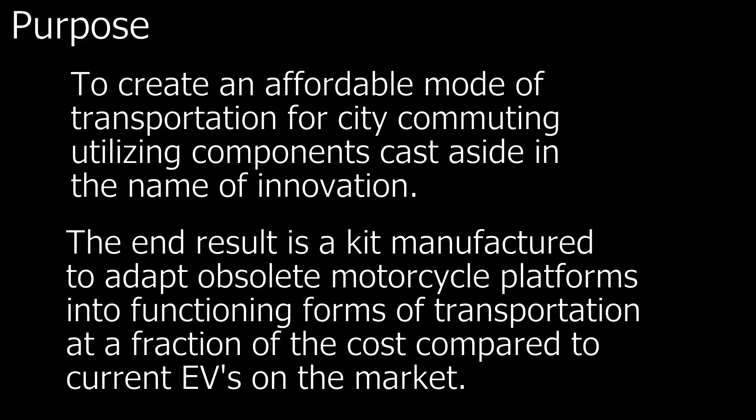The purpose of my project is to turn forgotten materials such as older motorcycles into functioning forms of transportation, while also solving a crisis involving budget as well as the environment.

Comparable EVs on the market include the Tesla Model 3 at $40,000 and the Harley-Davidson Livewire at $30,000. My budget goal, on the other hand, is merely $1,400.

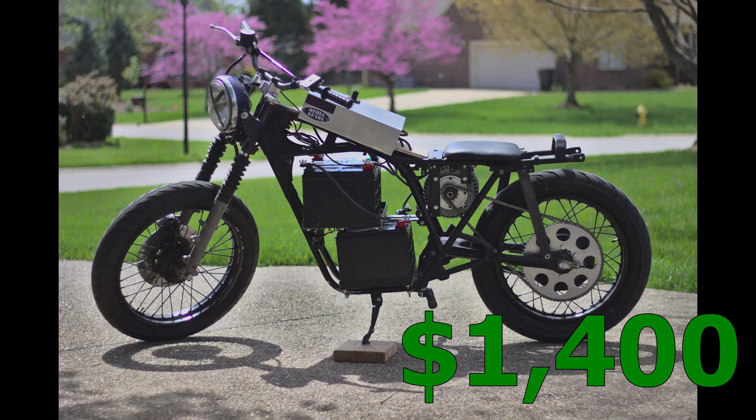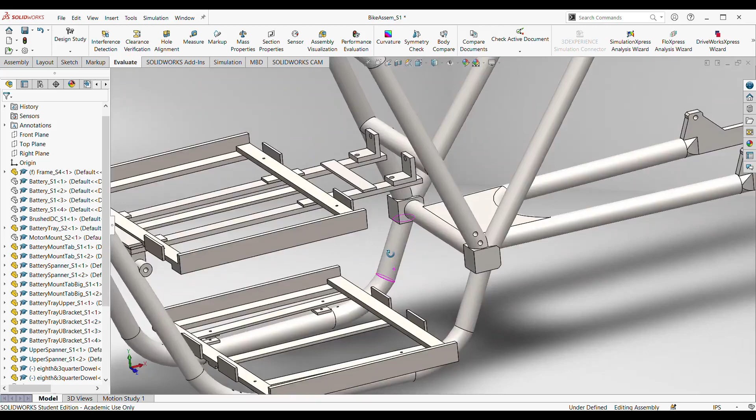So, on to the build. My build starts with a virtual recreation of my motorcycle frame, recreated in SolidWorks. Here we see the frame and the beginnings of my battery tray. We put them together, and we see that we can use old mounts and continue to grow using the old motorcycle platform. Eventually, we will move on to the motorcycle motor mount, which sits under the seat.

Eventually we can mock up the real-world motor that we will be using in the project. Here we can see how the underside of the mount attaches to the motorcycle frame.

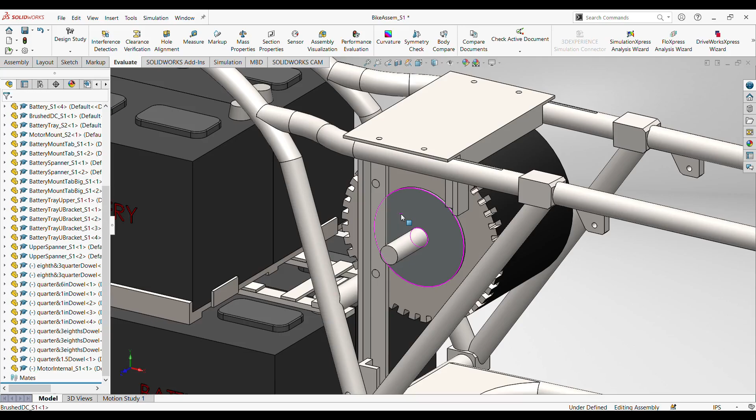The motor we will be using is a 15 kilowatt permanent magnet DC motor capable of 150 amps continuous and a peak of 300 amps. Electric motors behave differently than internal combustion motors, but we can expect around 18 horsepower from this motor.

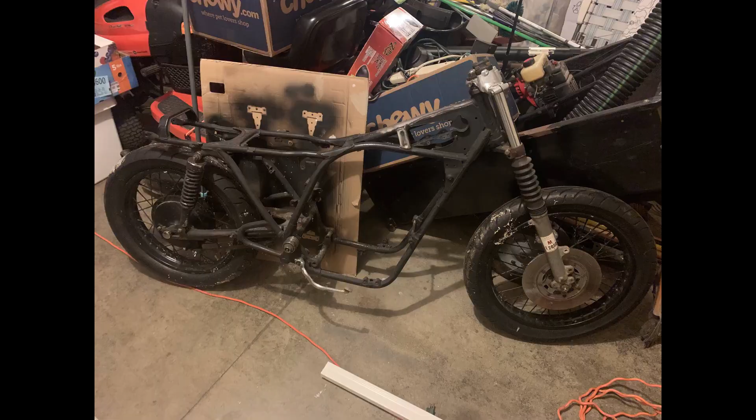Now that the virtual work is finished, we can begin on the physical work. The first of which involved removing all the old mounting tabs and hardware left on our old motorcycle.

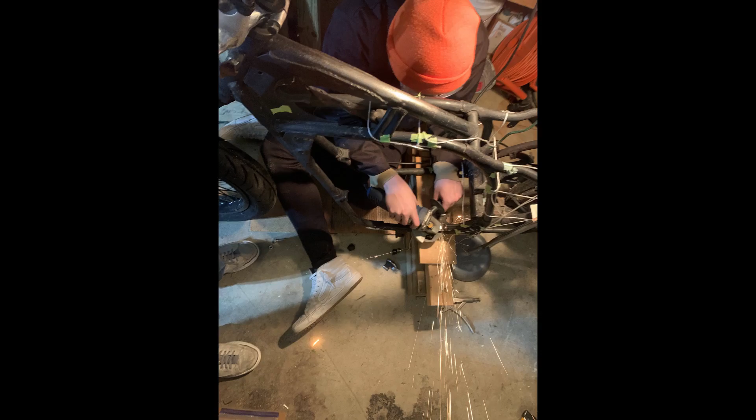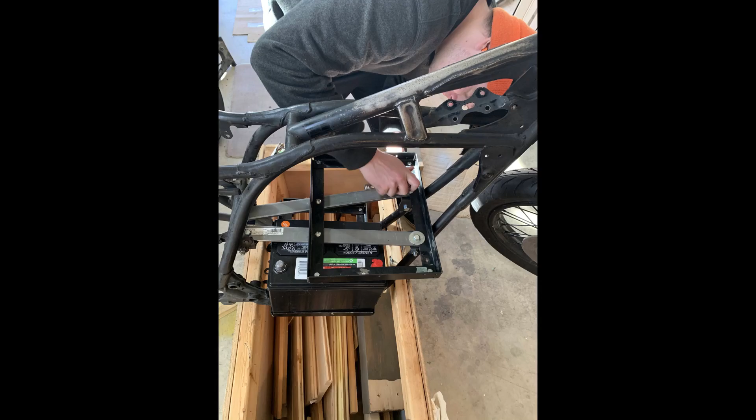The second part involved making our precision cuts and drilling in order to retrofit and begin fabrication of our custom mounts. The first of which is our battery tray, and the second of which is our motor mount. Both the motor mount and the battery tray use recycled forms of steel angle iron and flats.

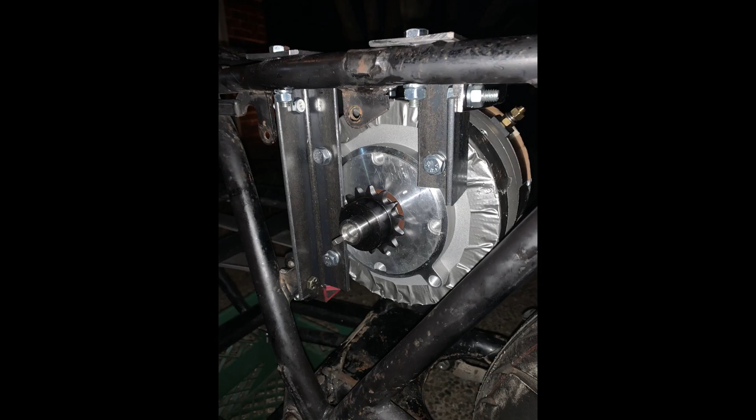The sprocket system utilizes a standard 14-tooth sprocket and a custom CNC milled sprocket with 72 teeth in the rear. The final step is the wiring, which I'll discuss further in just one moment.

Now that everything's pieced together, we're ready for a quick test drive. The first test seen here was ultimately a failure, as we had yet to tune the computer and had also not properly tightened the chain.

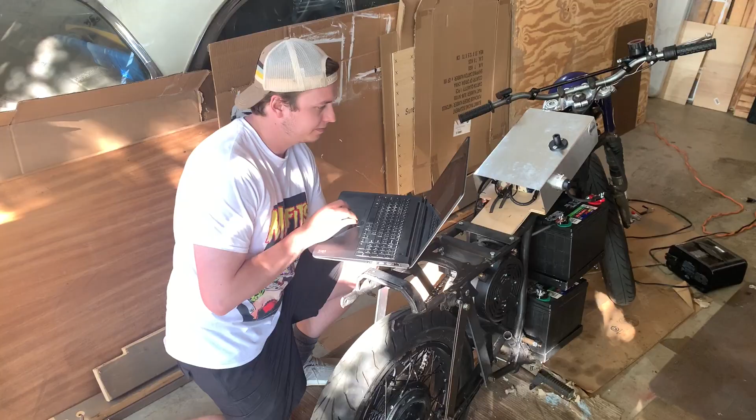So after that first failure, it was back to the computer. Let's take a look at the wiring.

The main system features a negative ground and a positive line into a 400 amp fuse and eventually into a 48 volt contactor. This contactor works by only allowing the system to operate if 48 volts is supplied. This is a recycled unit off an old forklift.

The computer is set up as follows. There is the main 48 volt positive in, the motor out, the throttle input, and a 48 volt system ground.

After multiple changes to the throttle input curve, as well as setting the bike acceleration to no more than 40%, we see here a successful test in which we're able to ride the bike around the block without crashing. A few minor cosmetic upgrades later, and we're left with a finished product.

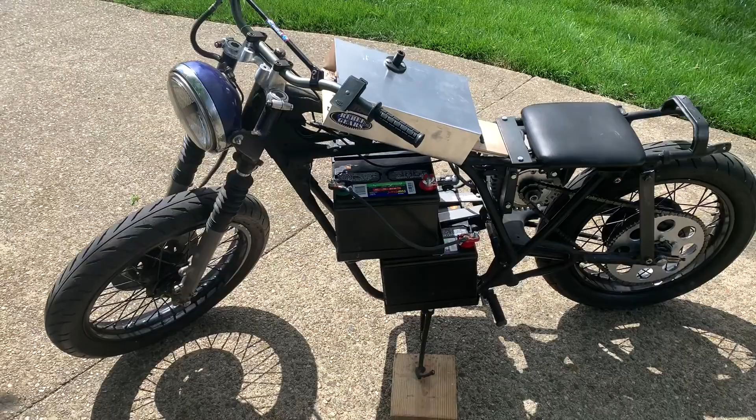But at this point, I bet you're all wondering, well, does it work? Or rather, is it practical?

Well, first we wire our 12-volt batteries in a series. There's a total of 4 batteries. At the end, you should be left with 2 leads, a negative lead and a positive lead.

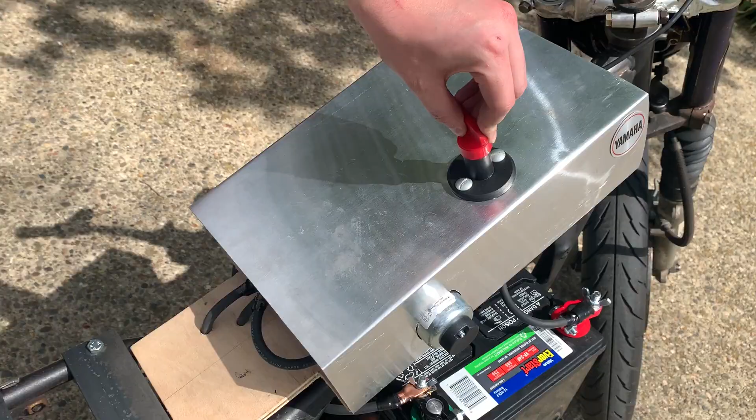Once those are connected, a simple twist of the key and a loud thump later, and the bike is ready to ride. With 4 fully charged batteries, I was ready to begin the first test.

The first test is range. In order to accurately calculate the range, I rode the bike from full charge to 0 in a relatively calm portion of where I live. I chose a speed of roughly 25 to 30 miles per hour in order to keep the motor under constant load. This would give me a more conservative range estimate.

My goal range was calculated as so: we should get around 32 miles out of our system. Unfortunately, I was only able to reach 20 miles during the test.

The acceleration test resulted in roughly a 1.7 second 0 to 30 time, which is a stark improvement over the stock bike, which would have been around 4 seconds. Braking from 30 miles per hour seemed to be comparable to the standard bike's time.

The final test is maneuverability. Although hard to quantify, I determined that through feel, this bike feels much better than those that I've ridden in the past. Ultimately, I was able to meet or exceed 3 out of my 4 metrics.

My goal budget for the bike is $1,400. In the end, I'd spent roughly $1,722 total. Although I exceeded my budget, I feel that the extra $300 was well spent as the bike is so usable.

In order to improve the bike, you'd have to make the jump to lithium-ion, as well as replace components that are causing friction problems. This would dramatically increase your budget.